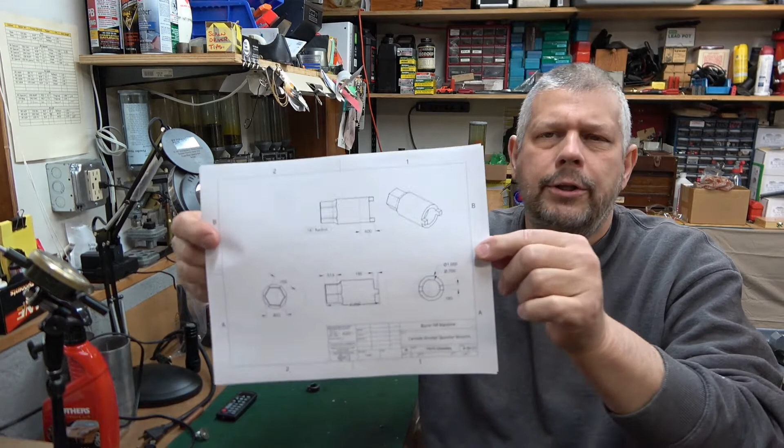I did alter the drawing a little bit from the last time I showed it to you, and the big difference is going to be the hex on the back side. Originally it was going to be a 7/8 hex, and I thought about that. It seemed awful big for what this is going to be, so I'm going to make it 3/4.

And when I do that in the milling machine, I'm going to side cut it with the end mill, rather than end cut it. It'll give it a little bit more character. Just dress it up a little bit. All right.

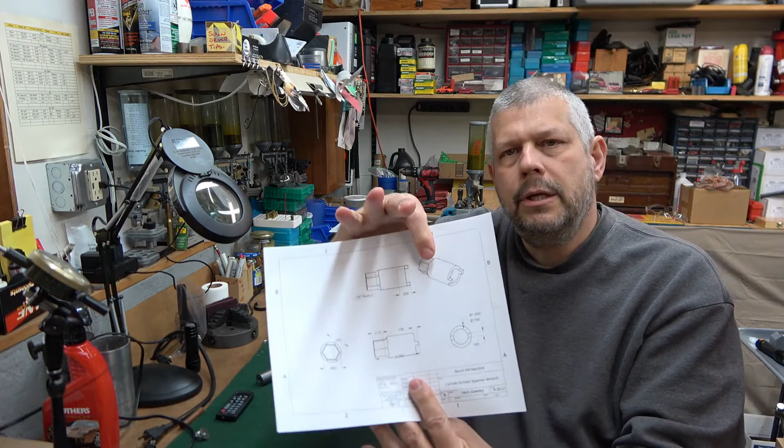So, off to the lathe. We're going to make it out of the rest of this bar of the 4140 I have. And I am going to make it deep enough so that if the lugs on the spanner become worn, I'm going to have enough room to be able to remake them.

That way, if it doesn't hold up the way I'd like it to, I can send that off to be heat treated. I do have a friend that owns a heat treating company right here in Providence, so I will send it off to him if it doesn't stand up the way I want it to. But I think it's going to be fine, but I want to build in a little planned obsolescence, if you want to say it that way.

Alright, so I'll see you over at the lathe in a couple minutes, pretty simple operation, and then out to the milling machine to put the hex and the lugs on. Okay, I'll see you in a couple minutes.

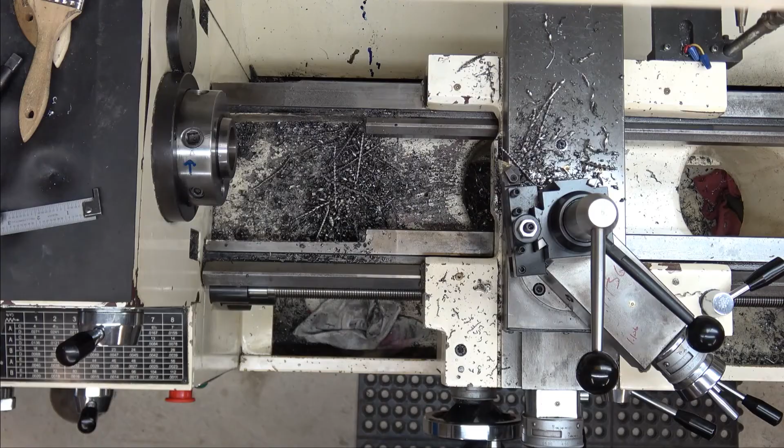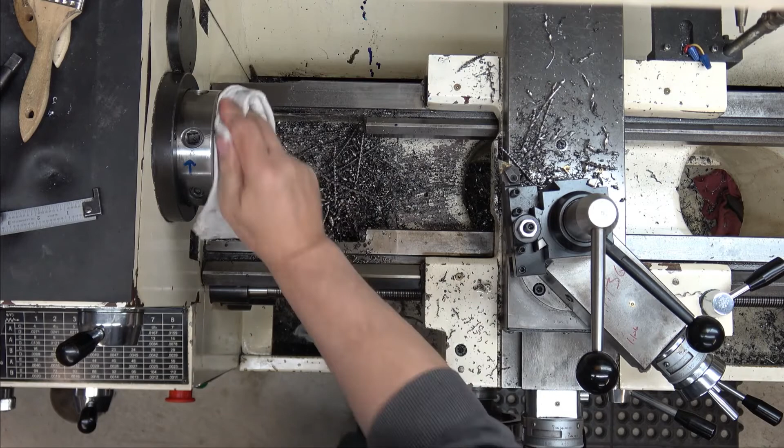Okay, so we're at the lathe. I'm going to put the collet in. I already took the chuck off. We'll make sure we get this nice and clean. And I always try to put this back in exactly the same way, or pretty close to it. I try to line that mark up with what I call the #1 cam lock.

Clean the collet off. And the drawbar is already up in there. Alright.

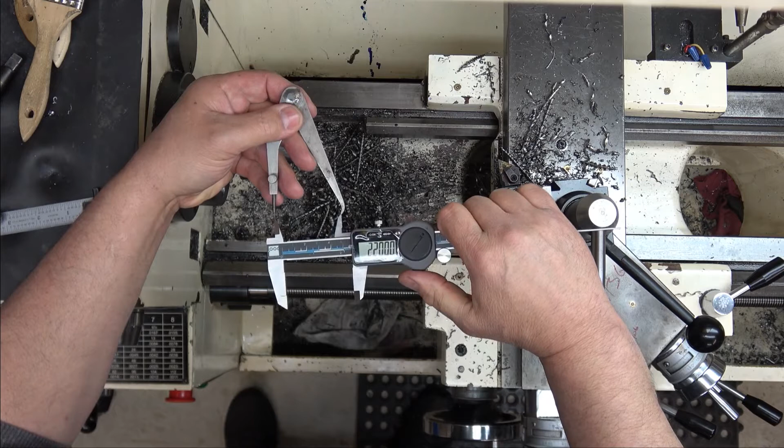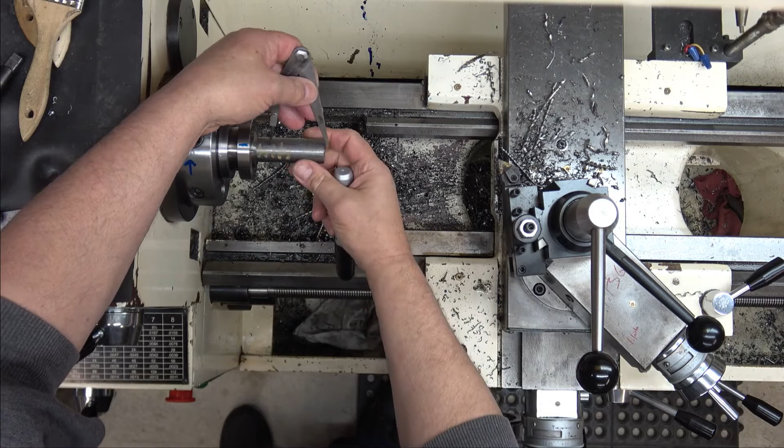Now the overall length of this part is going to be 2.200 inches. So I'm going to set my hermaphrodite calipers to 2.200. I want to make sure I leave enough sticking out here so I can actually cut it off.

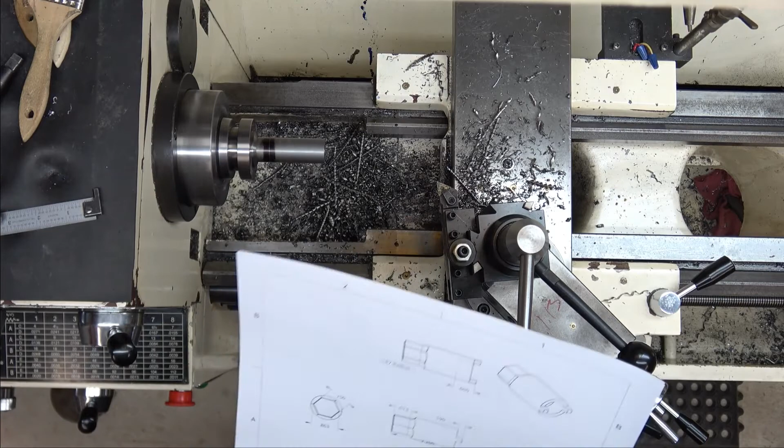So we're at 2.200. I'm going to part it off there afterwards. I'm going to drill the hole, part it off, flip it over, and then turn this section down to 866 thousandths, which is going to be the outside diameter, or the highest point on this 3/4 hex.

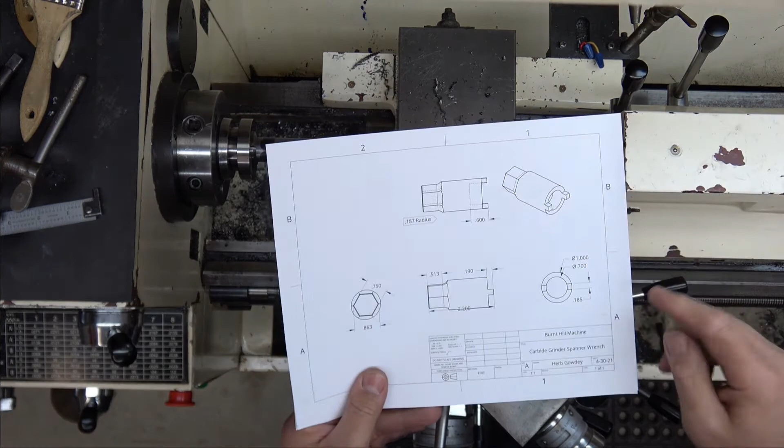Okay. I was digging through the bin of drills, and the print says that the hole is 700 thousandths. Well, I measured up the shaft and I drew the print. I don't know why I made it 700, but the shaft is a little under 625. All we have to do is give it a little bit of clearance so that if it goes over the nut and the shaft protrudes a little bit, it's got some clearance.

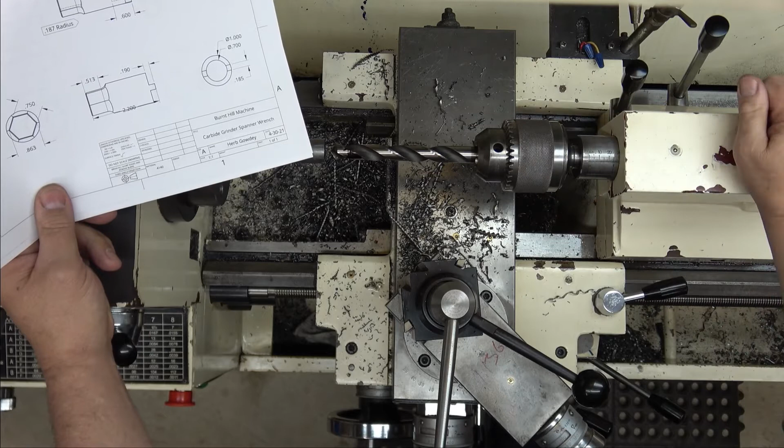So I found a 17 millimeter drill. I have no idea where that came from. It's actually a very nice drill. Really good grind on it. So I'm going to use that. That's 669 thousandths, so it's got plenty of clearance. So I marked the drill, put a little spot on there, and I'm just going to run it in. It's just a clearance.

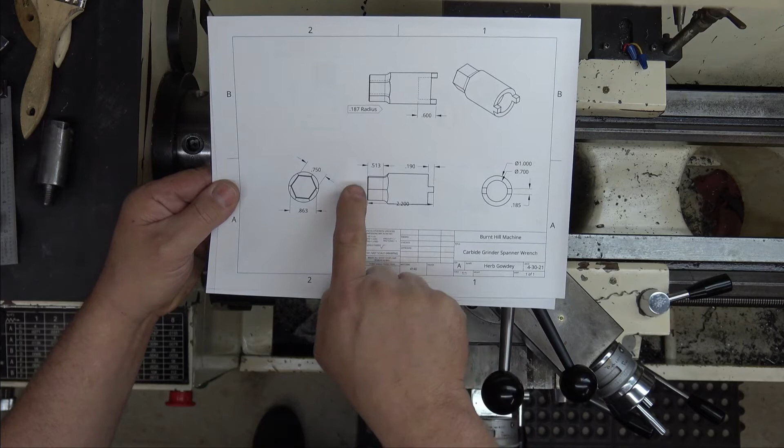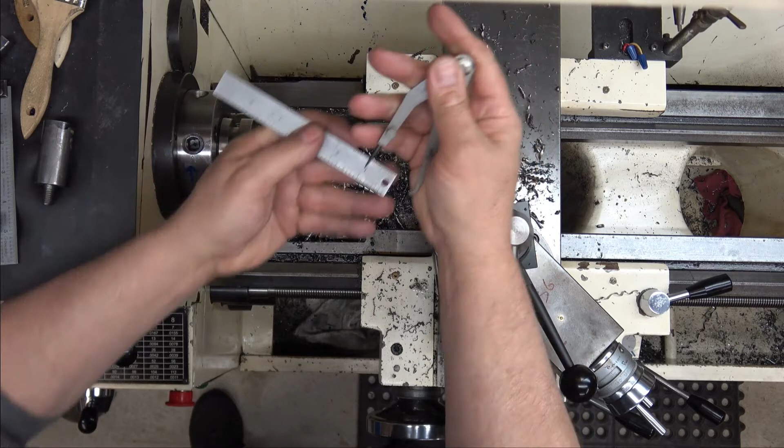Alright, so we got to turn this back. This is 1.500 or so. We're going to turn it to 863. We're going to grab the hermaphrodite calipers and a scale. And we're going to set this right on.

So what we're going to do is set this dial caliper to 863. And then we're going to zero it.

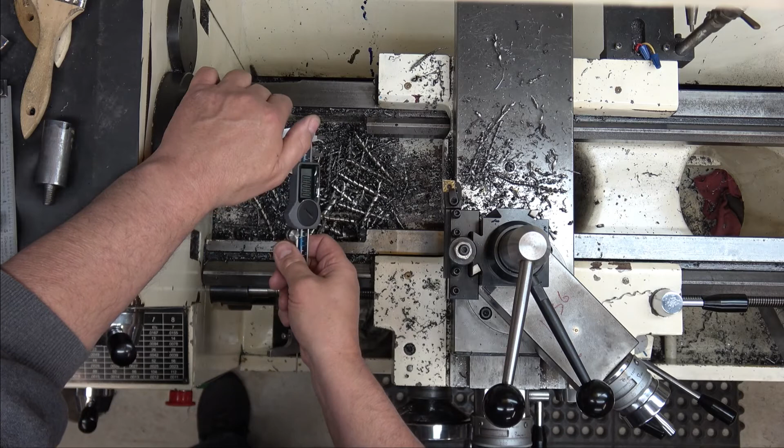Oops. And I'm 1 thousandth under, that's fine. Again, that's just the base circle of what this is going to be. I'm not too concerned about this, although I'll give it a little deburr, because the end mill is going to come up and put a nice radius in there, so it's going to clean that up. I just need to have about 1/2 inch for the wrench to sit on there. If you look at most wrenches that size, they're almost 1/2 inch.

Okay. All right, let's give it a quick little deburr. After I cut the flats, I'm going to come in here and put a nice chamfer on that. That looks pretty good. I'm happy with that.

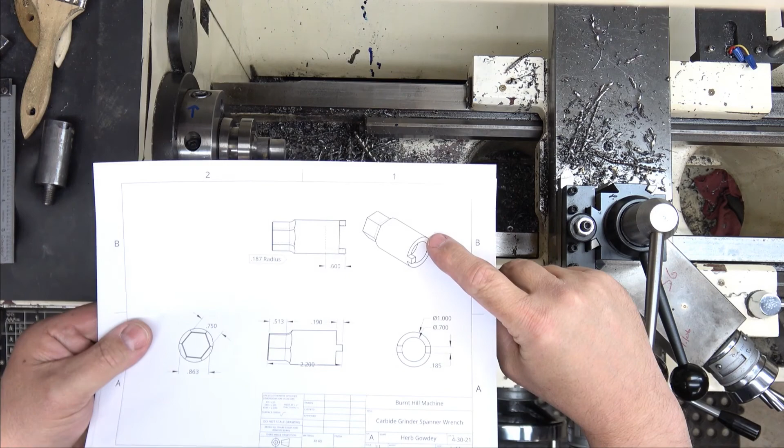Alright, so next step is put it into a collet block so that we can mill the lugs to engage the nut and do the hex. Okay, well, I'll see you over at the mill.